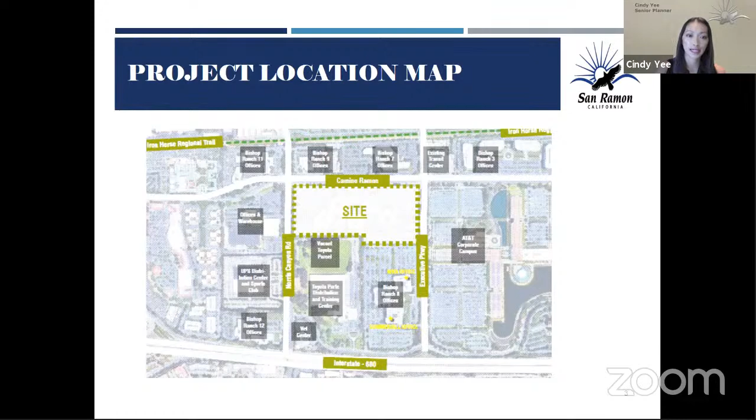Just again, to get familiar with the property, we are talking about a 31-acre site, Camino Ramon, Norris Canyon Road, and Executive Parkway as the boundaries of the property. Just a reminder, the property is the entirety of Bishop Ranch 6, which is a 31-acre site, currently has an office complex. The proposal includes a 404-unit residential development, along with a 2-acre park site and a quarter-acre tot lot.

There's no affordable housing proposal as part of the application, along with a specific plan amendment. There is a development plan, major subdivision, architecture review, tree removal, and environmental review. And so the focus of tonight's meeting is really for us to make sure that the commission has the information on the North Camino Ramon specific plan amendment so that action may be taken if so moved.

Just to recap on the amendment of the specific plan, there is in your staff report this evening, attachment A, Exhibit A, which details out the proposed changes to the specific plan. Some of the highlights of those changes include the amendment to the currently Bishop Ranch mixed-use land use designation, replacing that designation with a mixed-density residential designation that would allow for 14 to 30 dwelling units per acre. There's also associated definitions, guidelines, standards, descriptions, and maps that are associated with that project site, and those would also be part of the amendment for internal consistency.

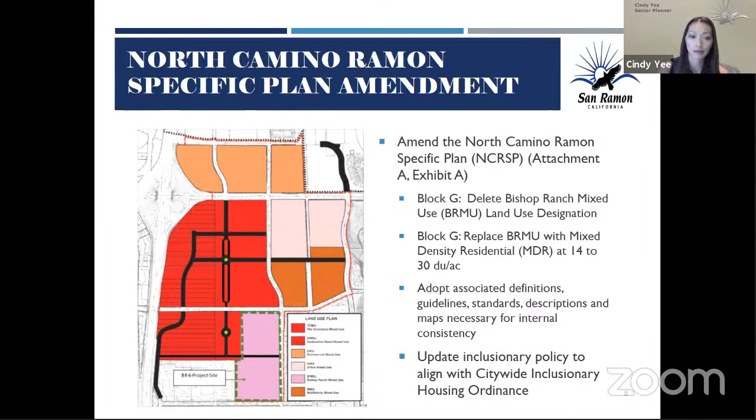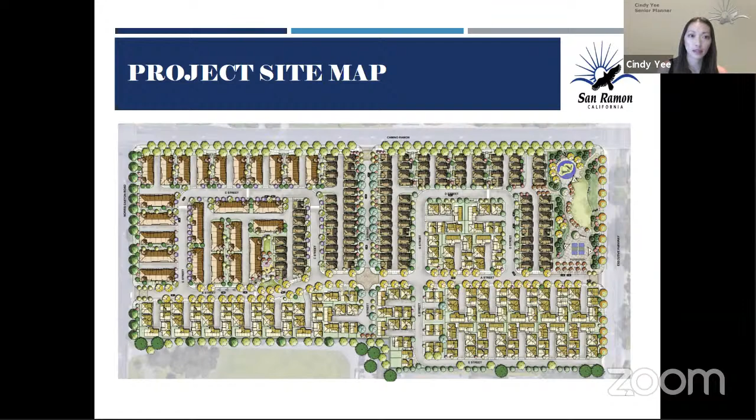And then, as mentioned, there is an update to the inclusionary policy where it ultimately would align with the city's inclusionary housing ordinance. Although we're talking about the specific plan amendments today, I thought it would just be helpful to see the site map and then its relationship to Block G in the specific plan. In your staff reports, you'll find an overlay of the proposed site plan onto Block G, just to give you a better reference as to where that improvement's going to go in relation to the current specific plan.

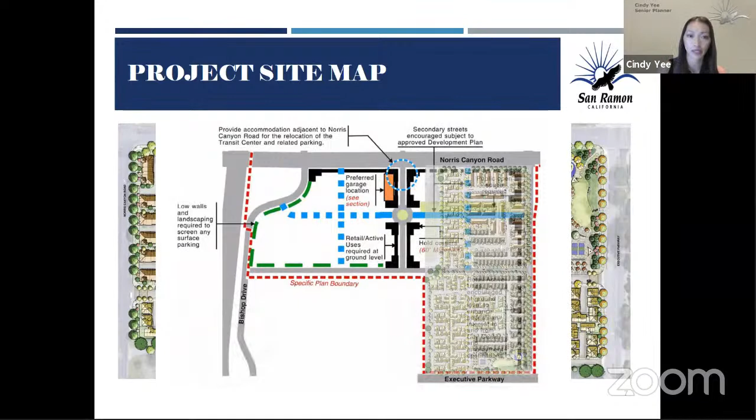And as with all specific plan amendments, the city's Measure G requires that a minimum of 3 public hearings are held before the Planning Commission and the City Council. Specific plan amendments require a 4/5 vote of the City Council after a recommendation in favor of such an amendment by the Planning Commission, also by a 4/5 vote.

As far as the California Environmental Quality Act, there is a requirement for CEQA analysis. A previous North Camino Ramon environmental impact report was prepared in 2012, and an addendum to that EIR was prepared to analyze the project's environmental impacts. That was attached to your staff report and attached by reference in your resolution as Exhibit B. There's also, as part of the analysis, a response to comments memo that was prepared addressing comments received on the addendum, and that's attached as Exhibit C.

I'm not going to go through the long history of the project review, but as you can see, there have been a number of study sessions and meetings associated with the project and the specific plan changes. Tonight will be the 4th public hearing on the project itself. Once the commission takes action, subsequent to that will require the City Council public hearings.

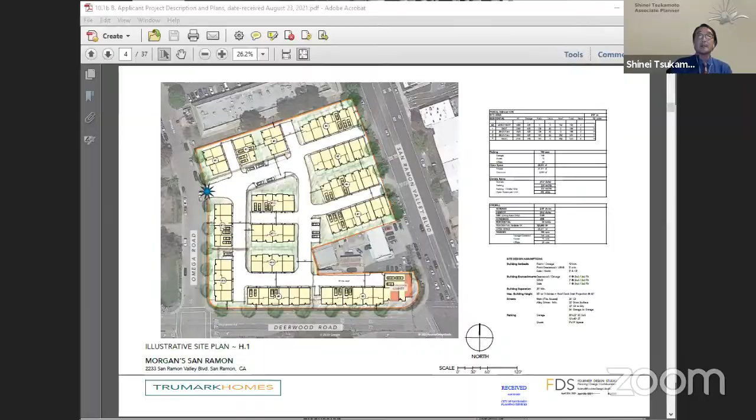Also, the way the applicant proposed the corner at San Ramon Valley Boulevard and Deerwood Road, which the specific plan envisions as a new retail node, the proposed project does not seem to address that clearly. The applicant is also contemplating the option to amend the specific plan standards so they may be able to move forward with this project. So with that, I will stop sharing this and move on to their PowerPoint presentation.

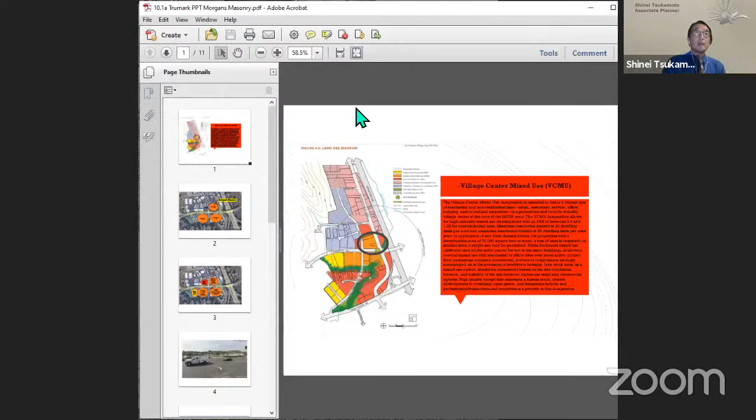Good evening, commissioners. My name is Garrett Hinds. I'm the Vice President of Architecture and Design at Trumark Homes. Trumark Homes is based in San Ramon, next to City Center, just about a mile from City Hall. We've been building and developing land in California for over three decades. Thank you for allowing this discussion tonight about the Morgan's Masonry site.

We have studied the San Ramon Village specific plan in depth and find many great planning goals and intentions. We're not saying there's anything wrong with the document or that it's flawed in any way. We're simply asking to dive a little deeper into this particular site and share our perspective as a developer. Trumark Companies is much more than just a home builder; we have various divisions focused on all development opportunities, including retail, office, and mixed use.

Our studies for this site began by reading every word of the village specific plan. Then we attempted to physically design the site with everything asked for, including a minimum of 30 homes per acre, plus a minimum of 0.5 FAR for non-residential use. These minimums total up to 105 residential homes, plus at least 64,000 square feet of non-residential use on a 3-acre site.

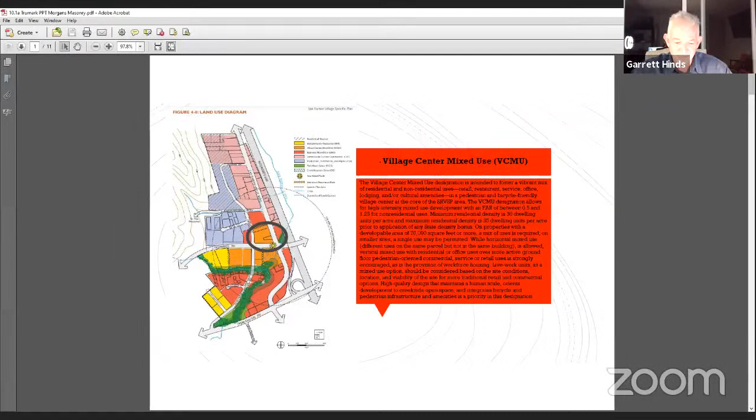As you know, the Morgan's Masonry site is one of three sites identified as Village Center mixed use at the intersection of San Ramon Valley Boulevard and Deerwood Road. The total minimum uses for these three sites would equal 360 dwelling units plus 261,000 square feet of non-residential floor area.

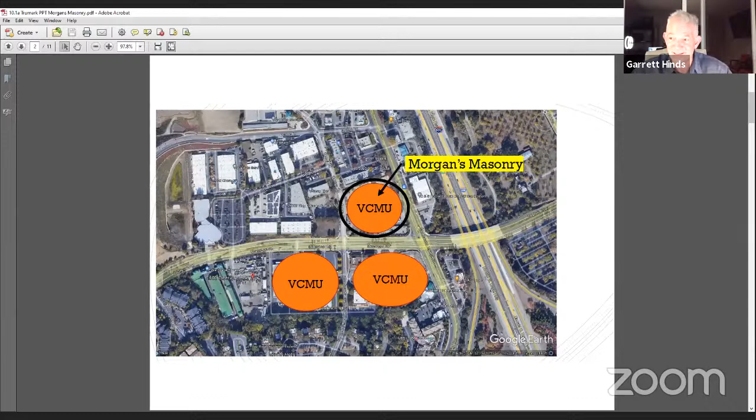To date, the ROEM site on the lower right is approved to bring 169 of those 360 homes, plus 6,000 square feet of commercial. The residential units would equal 37.5 units per acre on the ROEM site, but the non-residential use is far less than what should have been 98,000 square feet.

Again, I'm not saying anything is wrong. I'm just pointing out how things can change based on a combination of two big things: physical conditions of a site and market conditions. The specific plan was approved last November, but it's important to recognize the task force began their efforts back in 2017. Many things have changed in the last five years, such as the demise of brick and mortar retail, as well as the recent swell in work-from-home situations. These two market factors make you ask the question: is non-residential use really the best choice at the Morgan site?

The Morgan site has physical constraints similar to the ROEM site. Yes, these sites have great traffic and visibility, but without safe and convenient street parking, the sites are forced to add substantial on-site parking facilities to support both residential and non-residential uses. For example, on the Morgan site, the minimum 64,000 square feet of non-residential use would require roughly 320 parking spaces, plus parking for residential uses of another 200 spaces. That's over 500 parking spaces total on a 3-acre site.

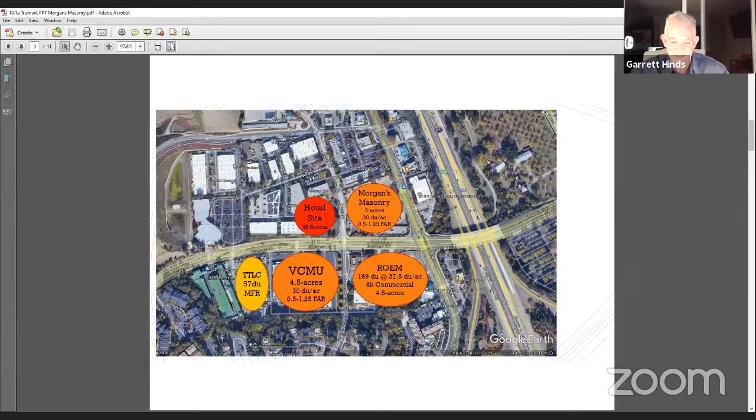I'll admit I didn't attend the ROEM hearings, but I must guess these aggressive program goals were part of that discussion for that site. I don't believe this is the first time you're hearing these concerns about such intensity in this location. As with the ROEM site, reducing the intensity of uses here doesn't mean we can't achieve many of the other great goals in the specific plan, such as pedestrian connectivity through the site, buffering to existing uses, and strengthening the San Ramon Valley Boulevard corridor and gateway—all to catalyze positive change.

Our proposal tonight promotes a solution for today's market needs. Exactly what the architecture looks like isn't important tonight, it's secondary. I'd like the discussion to be about an appropriate program for the Morgan site. To me, what's not appropriate here is up to 105 homes plus 64,000 square feet of commercial plus 500 parking spaces. Just for perspective, 500 parking spaces is an entire football field covered in parking, four stories tall—a whole acre of parking, four stories, that's 500 parking spaces.

But instead, how about 72 homes at 24 homes to the acre, 10,000 square feet of live-work ground floor home office retail space, and only 200 parking spaces. Yes, this program is less intense, but it matches today's needs and many goals of the specific plan.

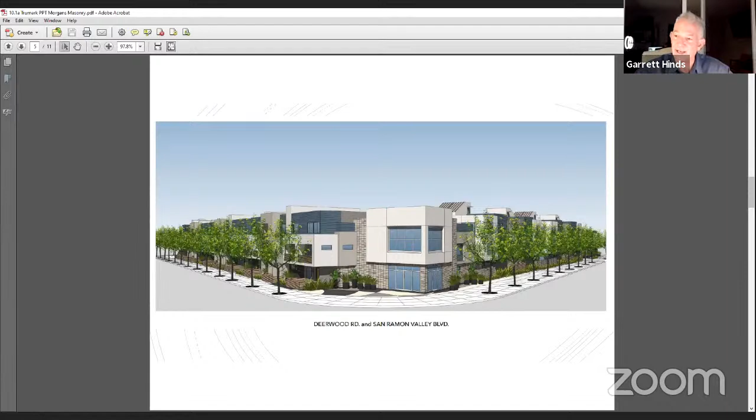I also believe it fits a little bit better with your climate action plan for less intensity and less cars. Next slide, please. Do we have every detail figured out tonight?

No, of course not. Our vision creates a work from home village with ground floor live-work shops fronting all 3 sides, all 3 street frontages, as well as all the internal paseos connecting San Ramon Valley Boulevard to Omega. Existing parallel street parking along San Ramon Valley Boulevard and Omega support less intense non-residential home office cottage industries, such as accounting, architecture, interior design, and many other professional endeavors.

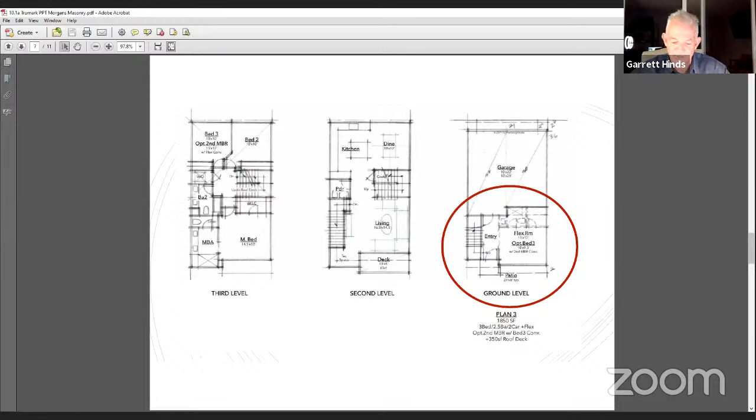Next slide, please. Today's retail doesn't necessarily need to be a place to meet, but our current plans work either way. The ground floor live-work home offices shown in the red circle here, with an integrated front patio, would create an active village atmosphere for the site's external edges and interior green belts.

Next slide. Businesses can hang a shingle out front and interact with the community. The village is bustling all day, and in the evening the residents close shop and live life, supporting local restaurants.

Next slide, please. The architecture can be contemporary, or we can look at a more traditional design, of course. We chose contemporary so we could promote rooftop decks for added outdoor living and help increase the density to get closer to 30, which is the goal. Our proposal is 24 homes per acre.

So many cities today around the Bay Area promote this magic number of 30 homes per acre without fully understanding the huge jump, not just in extreme added expense, but 30 homes per acre is also much less popular, which means much less valuable. The difference between 24 homes per acre and 30 homes per acre equals infeasibility.

It requires a different construction type, different parking configurations, and simply lives differently. It's a jump from living in a house to living in an apartment. We'd like to build what people want to live in, not a number.

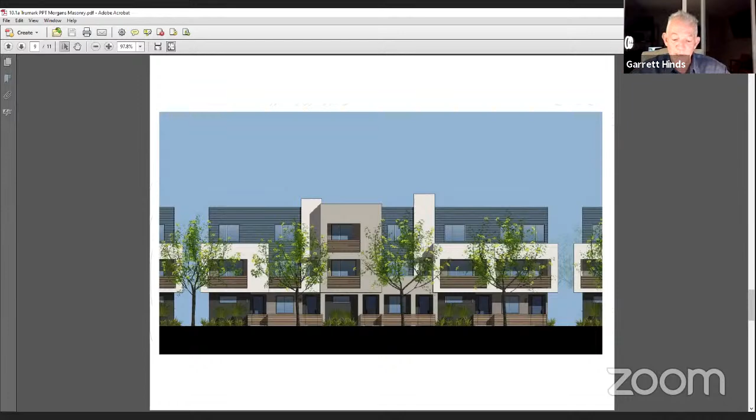Next slide, please. One additional item to point out about the site that Shanae pointed out is the notch in the Morgan's Masonry site, the missing tooth, I call it. This is an auto body shop parcel separate from the Morgan site. We have been actively working with this landowner for 2 years now, but to date have not been able to fully satisfy the landowner. Tonight's discussion hopefully will provide a clear message, allowing our negotiations to proceed.

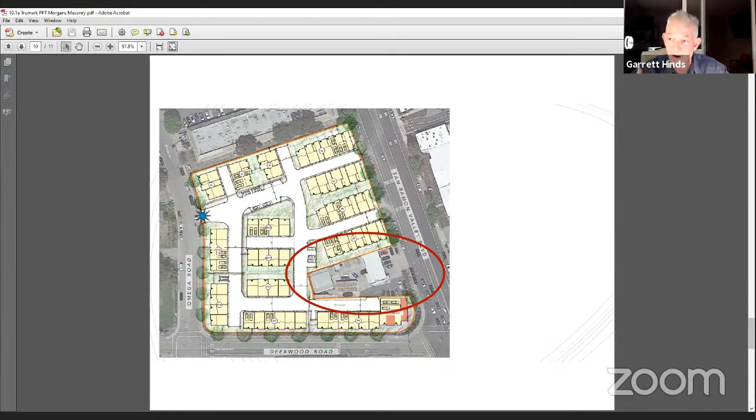We have designed a site to work around the body shop and be able to slip in the remaining piece. But honestly, I don't think any of us here want to go forward without this piece in play. I will say that a lower density, less intense program will help our ability to negotiate with this landowner. I've seen this before, one landowner controlling the ability or inability to deliver the city's dream.

If we don't do something, then I'm afraid your gateway, your approved hotel, and the ROEM development may all be at risk of moving ahead in the near future. If I had a boutique hotel across the street, I'd have second thoughts about building it next to an active construction material yard with truck activity starting every day at 7 a.m., wouldn't you?

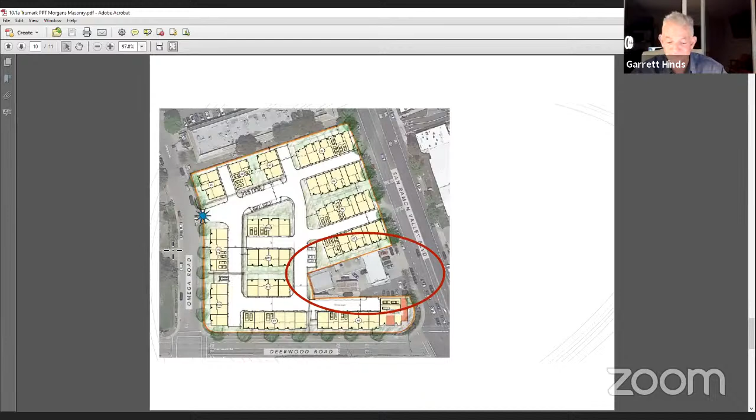Next slide. Next slide, thanks. In closing, we have not provided all the details, not yet. But before going deeper, we'd like to hear your thoughts about this possible adjustment to the specific plan.

We'd like to move ahead and provide details for this less intense program, but need to hear your openness and general support to this idea. So specifically, would you support less than 30 homes per acre, somewhere 22 to 27 homes per acre?

Basically change this to a multifamily residential category. Number 2, would you support roughly 10,000 square feet of live-work retail instead of 64,000 square feet of non-residential? The less intense program would lessen the parking needs again, from 500 cars to 200 cars.

Finally, and to be clear, we know our request requires a revision to the specific plan and associated approvals. It's not over the counter. We understand that and think it's worth it for all stakeholders. So with that, those are the big questions tonight. Thank you so much. I look forward to your conversation.

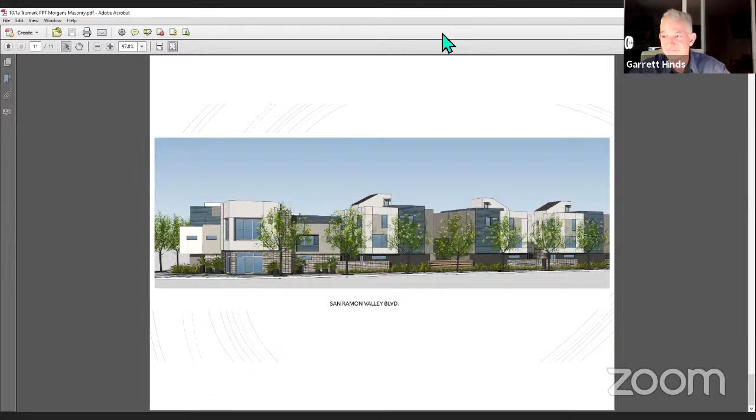So with that, I'd also like to clarify one other thing on this proposed concept, and also it's within the San Ramon Village specific plan. There are not conflicting, but 2 ways of calculating the density for this project. One way is to go with a general plan approach for residential density, calculated based on net project site, where the specific plan calls for gross site area to determine the density. And that is one of the questions to the commission.

Staff is asking your guidance on which direction, or which method of density, is appropriate. Not only for this, but for all the remaining development potentials in the specific plan, as well as for the rest of the city.

Okay, thank you. Are there any questions the commissioners have before we move on to public comment? Questions clarifying either to the applicant or to staff?

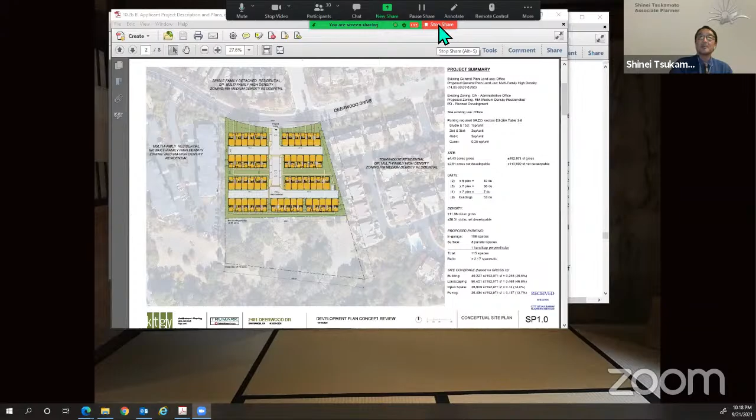Excellent. So just a moment. This one.

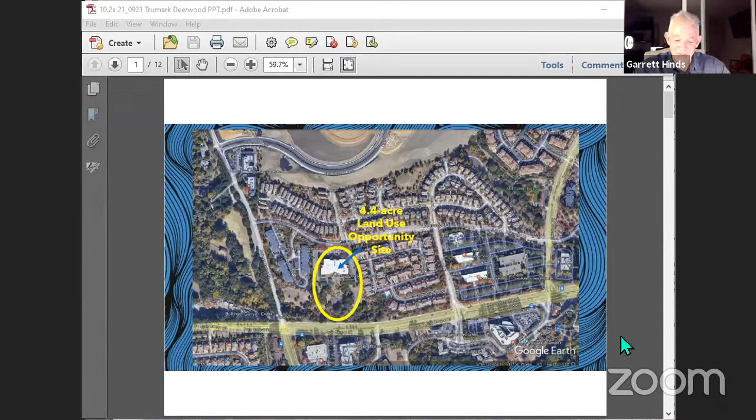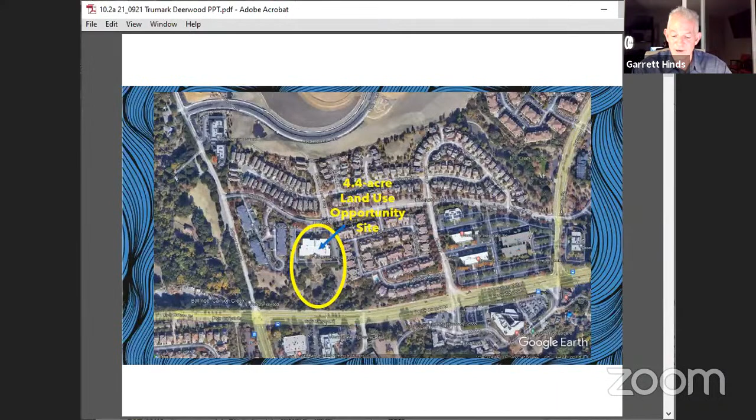Wonderful. Well, again, thank you for the chance to discuss a land use change opportunity site in our mind. This site recently became available and the property owners wish to sell today. Due to it being surrounded by residential uses, we thought it may be considered to change from its current OA administrative office land use to RM medium density residential land use.

But before considering a land use change, our office division studied the facility for a potential reuse and determined that it's not an ideal office, as Shinei said, due to lack of parking to support a marketable office in today's office climate. The building was designed for servers and power sources and very few employees. The current parking doesn't match today's Class A office needs. The building has been vacant for over a year.

Therefore, we felt compelled to start this discussion with staff, who acknowledged that with further study, maybe it's an opportunity for residential use. We all know there are many things to study, such as traffic, creek setbacks, developable versus non-developable areas of the site, utility capabilities - all that will be a second tier study. But today, in general, the conversation is: is this a potential residential use site?

And before I go further, I want to make sure everybody knows Trumark is proposing a residential use, which comes with meeting your affordable housing ordinance, just like we would have proposed for Morgan. So we're not trying to get out of anything. Affordable housing, working with the fire marshal - all of that is the standard approach when we get to that level.

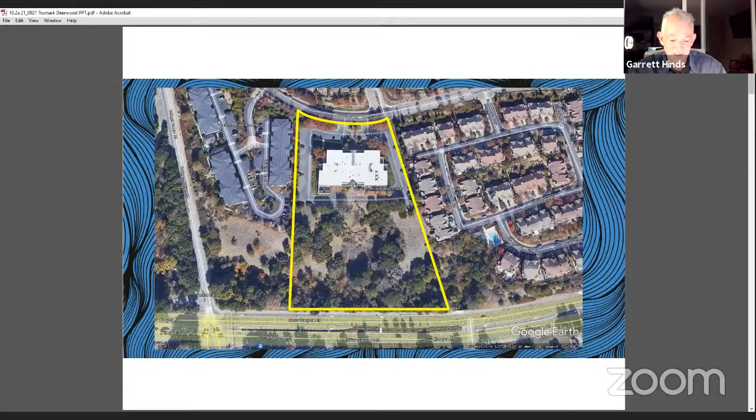So next slide, please. I'd like to take a minute to point out some of the basic things I noticed looking at the site - first of all, the surrounding uses and edge conditions. Next slide, please. To the west, we have 3-story apartment flats. You'll notice they're built very close to the property line, I believe, to maximize the upper flat area of the site for density.

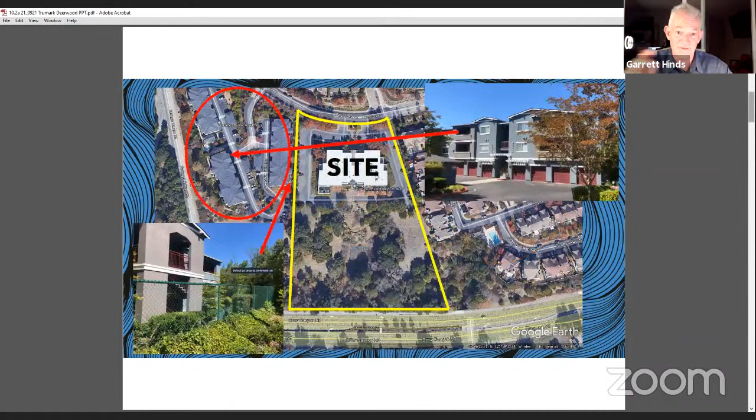Parking for these homes is a combination of 1-car garages on the ground level with living on the 2nd and 3rd levels, mixed with carports. There are no driveway aprons. Guest parking is arranged on the site with open parking stalls. This style of home usually gets about 25 homes to the acre.

To the east, we have 2-story single-family homes attached in duets, triplexes, and fourplexes, like townhomes. These homes back up to the east property line with backyards. They have full-length driveway aprons and all 2-car side-by-side garages. This style of building generally yields about 12 homes per acre.

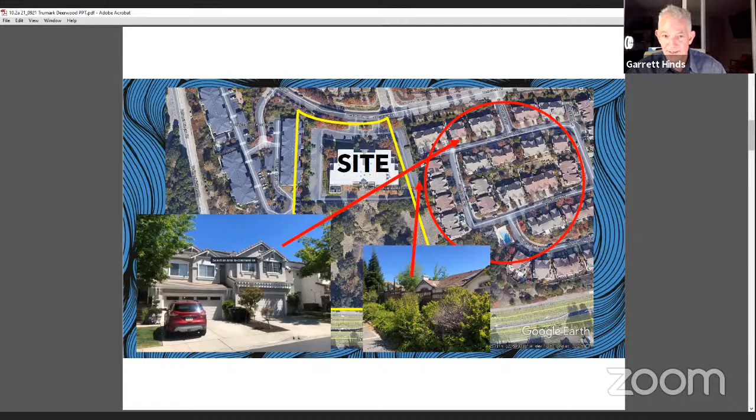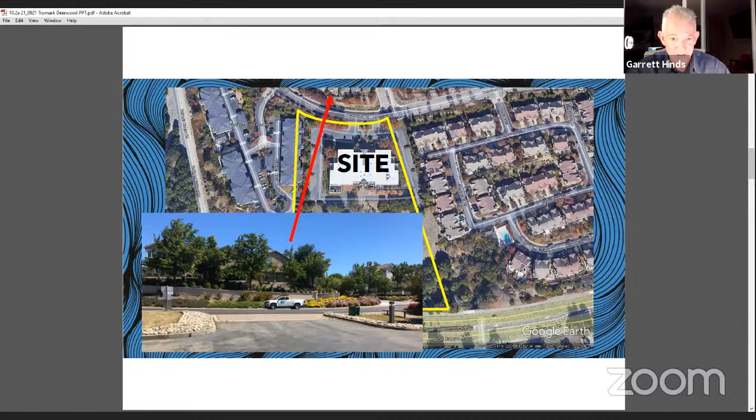To the north, there are 2-story single-family homes on approximately 4,000 square foot lots set above Deerwood Drive. 4,000 square foot lots generally get about 6 homes per acre.

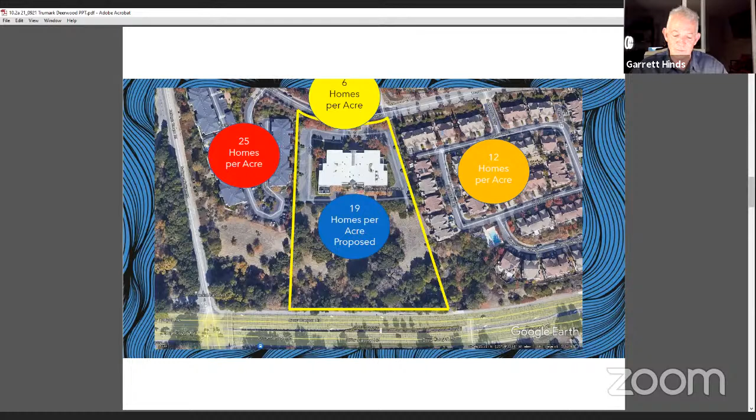To summarize, this site is surrounded by 3 different residential densities and building configurations. What we are proposing is a 4th style to complement these 3 that you already have. Again, the row townhome - it's a transitional density with family-oriented floor plans. I'm not asking for a high rise. I don't think that would blend into the existing fabric in this area. I'm asking for a home type that would blend and complement with what's there today.

The next slide shows a blow up of your general plan and shows how the land uses are. This site, the yellow star, is surrounded by multiple family, high density, 14 to 30 DU per acre residential land uses. That's what's in the area.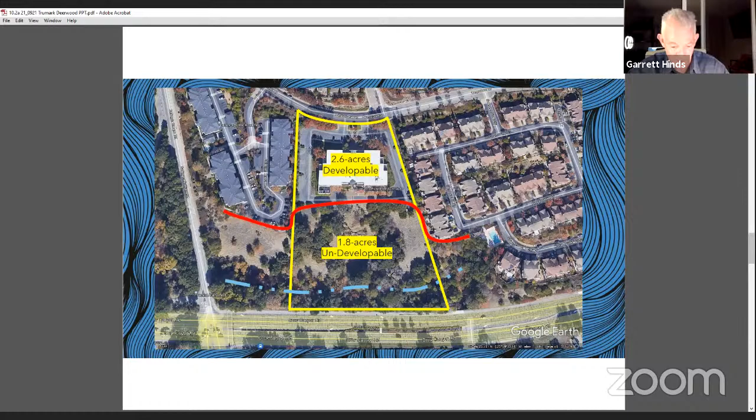Next slide, please. Trumark is proposing 53 family-oriented attached row townhomes. This is just a first pass layout, yet to be vetted thoroughly by staff, engineering, fire. Everybody would get to go through this, and we would do everything we can to make it perfect to everybody, life safety being the #1 priority of course. 53 homes on 2.6 acres is generally about 19 homes per acre.

This layout hides 2-car garages in the rear of the units, so not to be seen from the public realm along Deerwood Drive. An internal linear park would provide a protected place for residents to gather and barbecue, get to know your neighbors. The southern edge would have a common green belt, in my opinion, to allow all residents to stroll along this edge and take in the terrific distant views of the San Ramon Valley.

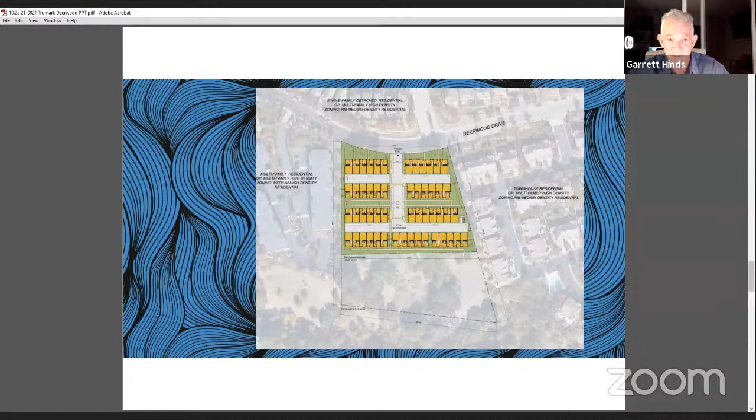Next slide, please. Instead of contemporary architecture, I think this site really lends itself to more traditional architecture. The final elevation style, of course, is yet to be determined. Due to the terrific valley views, we've been considering rooftop decks, but maybe not. We would understand the usual desire to blend with the context surrounding other architectural styles in the neighborhood - so Monterey, California Spanish, prairie, farmhouse, all things that would help blend and say San Ramon.

Next slide, please. At the end of the day, we see this again as a transitional residential density land use, transitionally connecting densities from 4 to 25 homes per acre in its immediate vicinity, blending and complementing the surrounding uses. We're asking you one big question tonight: could you support a land use change from administrative office to medium density residential?

Let's be perfectly clear - this land use change requires a general plan amendment and zone change, and the formal public review process that I just witnessed for 2 hours earlier. We're ready to take this on, and we're ready to start now. We understand you have a general plan update beginning next year, but we don't have 2 years to wait.

Then start a development plan 2 years from now? The opportunity is here today. We need to start the general plan amendment process right now. There's no reason we can't work together with staff in a concurrent process and end up in the same place, just 2 years faster. Waiting 2 years for a general plan update just pushes this opportunity out 2 more years - 2 more years with a vacant building, which by the way has a 2,000-gallon diesel tank next to all these homes.

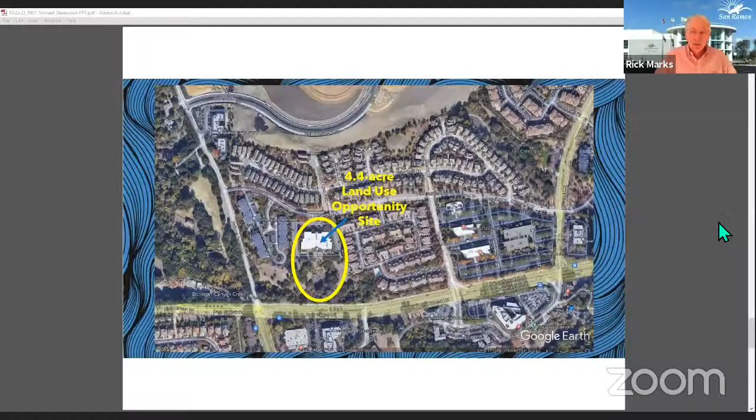Sorry, Shanae, that is slide 10, slide number 10. Thank you.

I'm not trying to say that's the architecture, but at the ground level, you're starting to do something that appeals to me. It's a traditional form, it can have a more traditional type roof. I don't want you to necessarily make it something that you see everywhere, but much more contextual. Much more contextual is important to me. This is an existing neighborhood, the neighbors are sensitive, and I think rightly so. I just have the sense that you'd be able to put in something that fits in on that property. So I'm generally supportive.

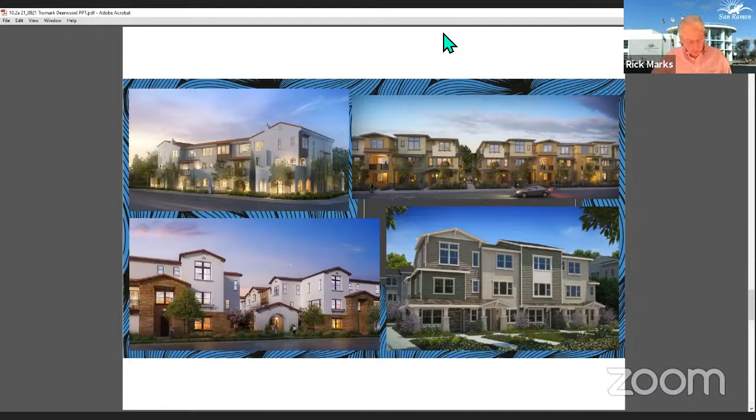I'm generally supportive of the general plan change. Speaking as a former staffer, I know that when these things happen and they're out of sync with the work program that staff may have in mind, there's a real strain on the staff in terms of can they get all that done given everything else on their plate. So I would hope that you would be willing to do whatever it takes in terms of bringing consultants on board.

To help the staff process this in an expeditious way. Timing is important to you, but they've got a boatload of things to do. And I think there needs to be a meeting of the minds here. Excellent.

Commissioner Edwards or Albert, thoughts? Sure, I'm happy to share some thoughts. I'm also generally in favor of the concept here.

I concur with Commissioner Wallace and Marks about the ability to move forward with the general plan amendment without needing to wait. And I also agree with Commissioner Marks' comments about staggering the units to create a more visually interesting site plan.

For my part, I think I'd actually like to see some additional density on the site beyond what you've proposed. It looks as though the adjacent apartment project is about the same height as what you've proposed. So this would seem like a good opportunity to perhaps add a fourth story to the building and the additional units that come with it. Whether you could do that via a townhome project or condos or apartments is up to you. I think there's a lot of different opportunities.